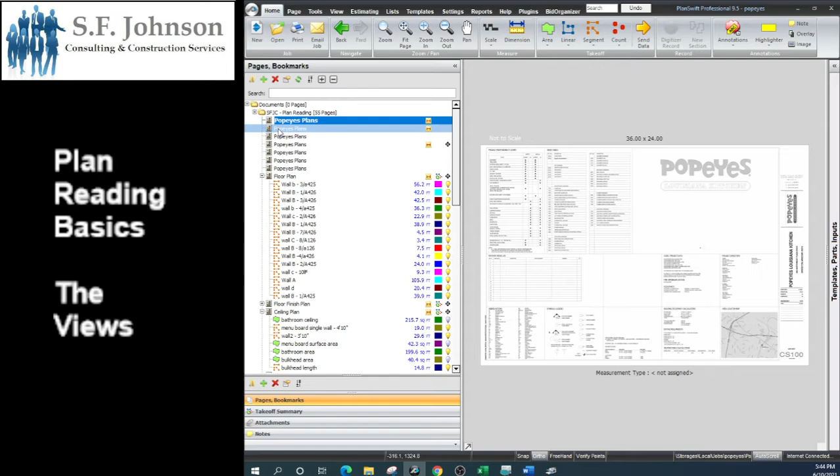We think we'll start with the cover sheet, and we'll start with the MEP site plan somewhere in here. And why isn't it marked? Oh, because Stacy likes making this life difficult. Let's hope we didn't delete it. Okay, let's go back.

Oh, there we go. All right, so we'll go with the MEP site plan. So plan view - when we say plan, it's the view from above, like if you're hovering over, maybe flying over. It's the most basic of the views. So what we're looking at right here is the MEP site plan in our study set. MEP is mechanical, electrical, and plumbing, and it's basically showing us the site plan from the plan view of where all of those things are located.

So if we pan in, we'll see 8-inch water, 4-inch gas, underground telephone. But the whole point is the view, or how we're looking at this sheet. So the view is again the perspective from which you're looking at the sheet or looking at the information on the sheet. The plan view is the most basic of the views.

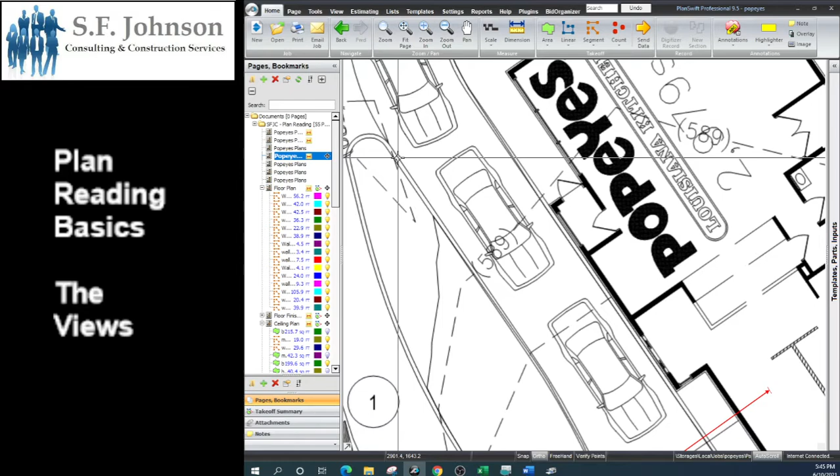I say basic in terms of if we wanted to construct maybe the curbs - from this view, we can't really do anything other than measure how many linear feet of curb we're going to construct. It doesn't tell us anything about the thickness, the radius of this angle. It doesn't give us any of that stuff. So we could do a very poor job if we decided to use this plan view in order to construct anything here.

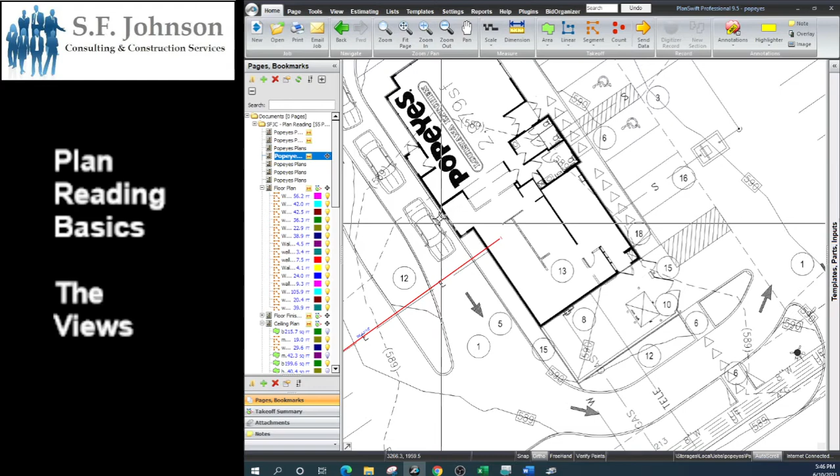Same thing with, say for instance, the exterior walls on the Popeyes. We can use this view to measure how many linear feet of exterior wall, but it doesn't give us detail to tell us the thickness of the walls - is it 2x6, 2x8, whatever. Doesn't give us the height of the wall. We don't know the height of these walls.

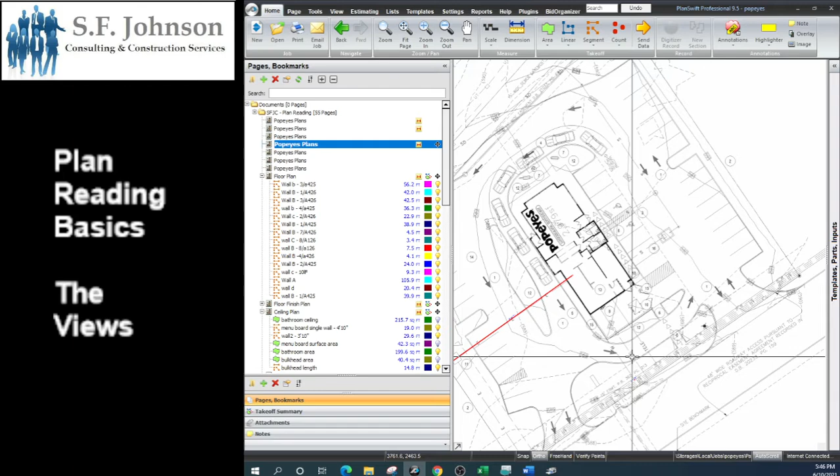So again, the plan view is the most basic of the views, and it gives us a good idea of what we're looking at. It's a view from above, but it doesn't give us detail. Let's go to another plan view, this floor plan - same view from above as if we've taken the ceiling and the roof off, and now we're looking into the building. Same view from above, and same thing: it gives us the information where we can measure how many linear feet of each of the interior and exterior walls are. They're even marked, so we know this is wall B. And pretty much the plan view, that's all we can do from a plan view, because again, we have the same problem - we don't know the height of the wall.

And so in order to see the height of the wall, we go to the second of the views, which is the section view. Section view gives us the vertical view of any section where it's intersecting.

Okay, so this is a floor plan. And so what the floor plan gives us is how many linear feet. But the section view is going to say, well, I'm going to tell you the height of the wall along this stretch or this section of wall.

And the way that you read it is that you go to image or picture number 1 on the page, notified or signified at the bottom. So we go to image number 1 on page A426, and this is a section view.

Again, the architect can only give us what? Abbreviations and symbols and lines and numbers to represent what they want us to do in terms of now I'm the framer and I have to build these walls.

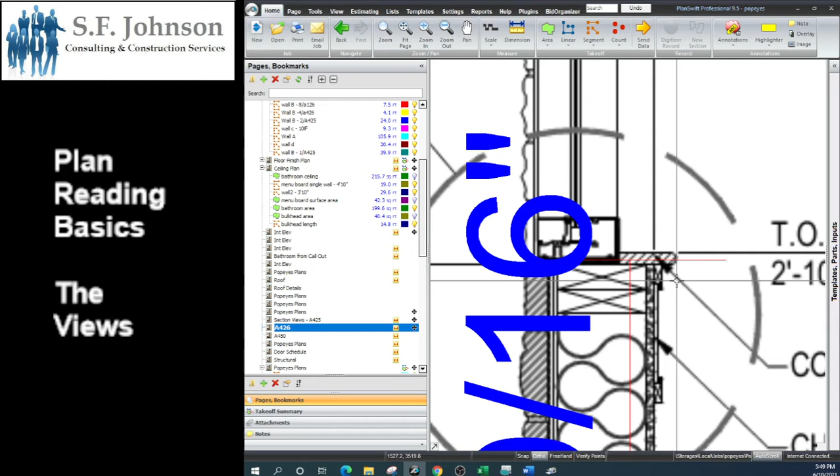Same concept applies if we want to see what is missing. So what the architect is saying, there's some stuff here. You see the sill, you see the chair rail, you see that it's 2x6 wood stud, you see everything on this side, but there are certain things detailed in here that we don't have written here that we need you to get another what? View.

Okay, so you go to the third of the views, which is the detail view. Same concept applies. So what do we see here? So we know what we don't see here when we go to 5 over A600. So you see what the difference is, right?

So again, we see the sill, we see the chair rail, stone veneer, even the expansion joint right here. And actually we have two callouts, right? We have 5 over A600 for this encircled here, which is the intersection of the bottom of the window and the top of the wall.

Okay, so that's pretty much what the architect is saying. There's something about that we need to see, that if you go to 5 over A600, and let's go there now, you can see what you don't see here.

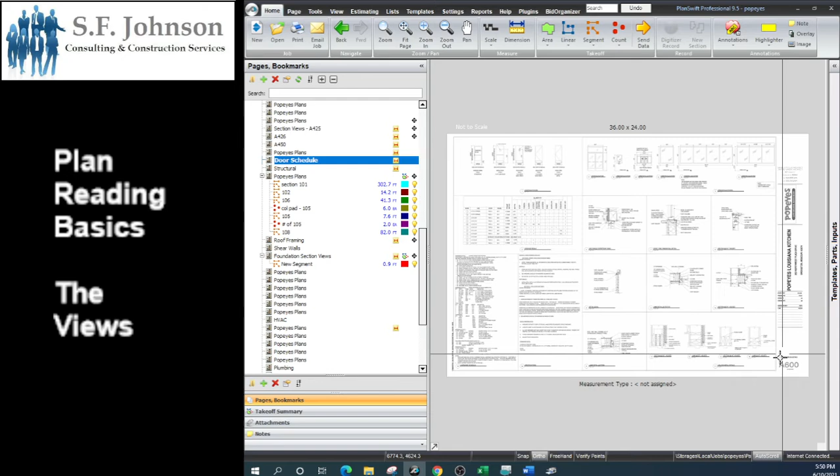5 over A600, here's A600, image number 5. Where is it? I don't have my glasses on, Grandma. All right, here we go.

5, detail at sill. So yeah, continuous caulking wasn't shown in the previous. Continuous flashing on the window wasn't shown in the previous, and all of this, okay?

And so now you've gone to the third of the views, the detail view. It is a detail view. And you see at the detail view, it gives you everything that you didn't see at the section view, so you can complete the proper construction at that area. Okay, so that's the third of the views.

Now the fourth of the views is kind of different in that we don't really need that view for construction. That view we need for the finish trades. Okay, so now what we're looking at here is the floor finish plan.

The floor finish plan gives us indication by all of the floor tags, telling us what type of material it is by pointing to it. But this floor finish plan also gives us these little things that look like section view markers, but they are not. They are elevation markers.

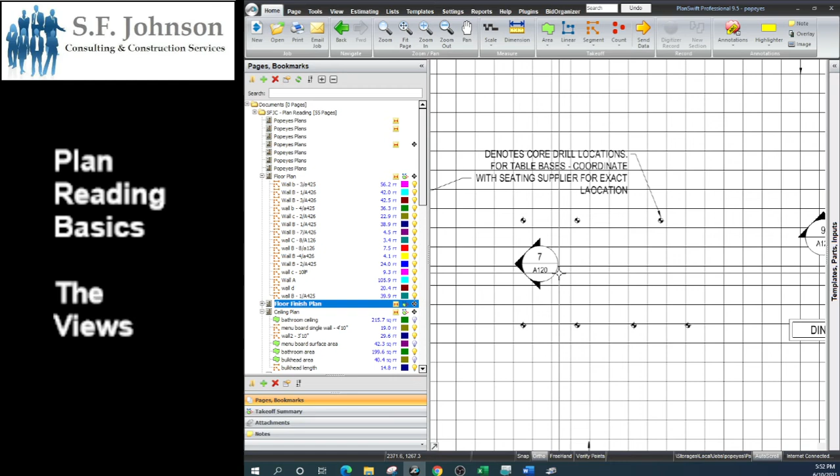So what it's telling us is that if we go to image number 7 over at page A120, we're going to see all the finishes that's here on this wall. If we go to image 9 over A120, we'll see all the finishes here and all the way around.

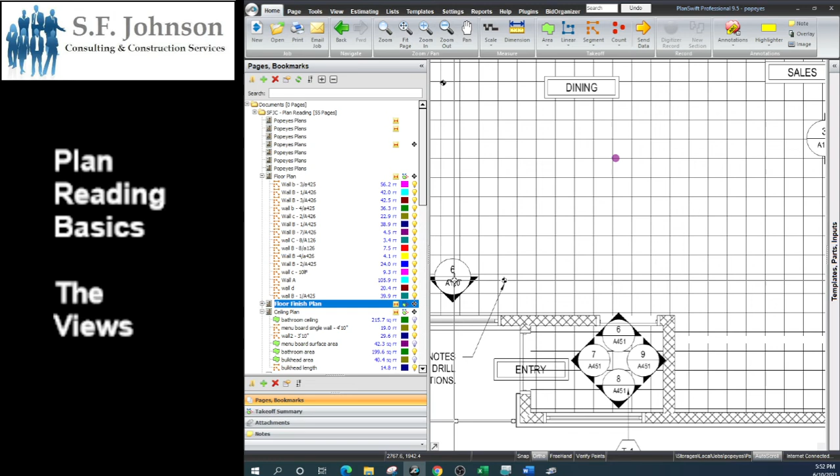You always want to see elevation markers. So this is an interior - these are interior elevation markers, are what they're called. They're used to point you to an individual wall, whatever it's pointing to. If you go to that picture on that page, it's going to show you how the finishes are arranged on the wall. So let's go to the first one, 7 over A120.

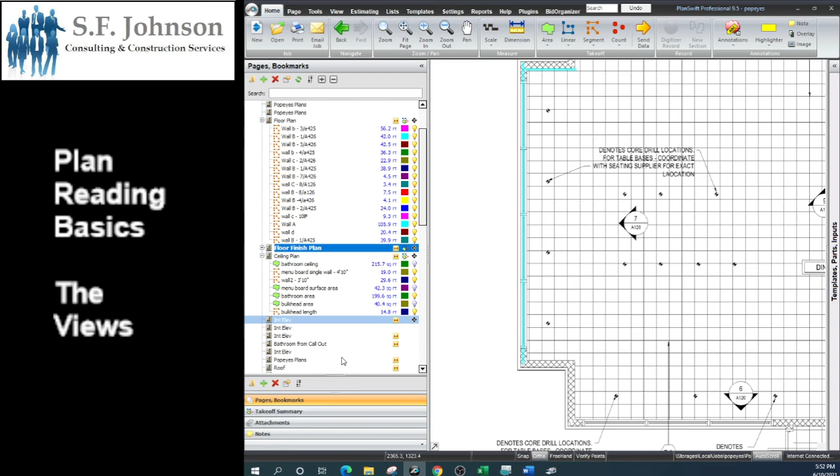Let's see, 7 over A120. This is 126, so we got to go back up a little, 7. And then image number 7. Okay, so image number 7 is right here, the dining room elevation.

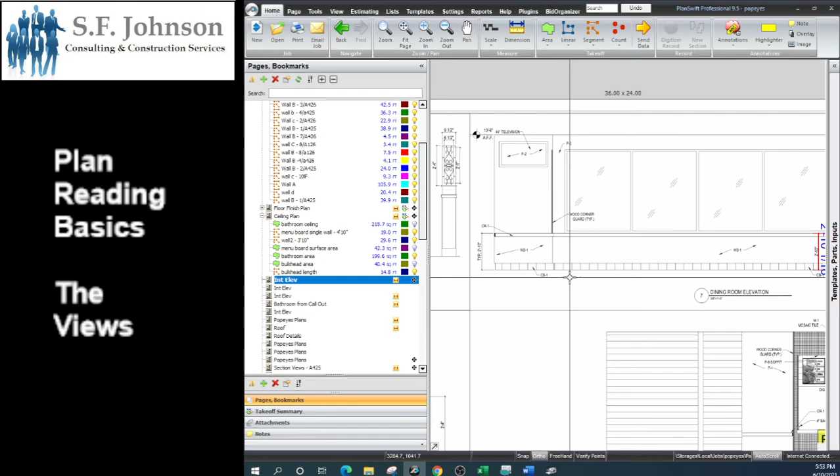Okay, so now it's showing us all our walls are built, right? So showing us where the finishes are going, where P2 is going, where WS/1 is going, where CB1 is going on that wall. So now I'm the finish contractor, I'm the painter, I'm installing some of the finish trim or finish whatever. I can make my measurements using the interior and exterior elevations.

You also have the same thing on the exterior. Let me show you some exterior elevations, right? Same thing for the outside. So now exterior elevations show you all the finishes on the outside.

So now I'm the brick veneer professional, I'm the caulker, I've got to caulk around the windows. I can use this to make all my measurements. Okay, so that completes the 4 views.

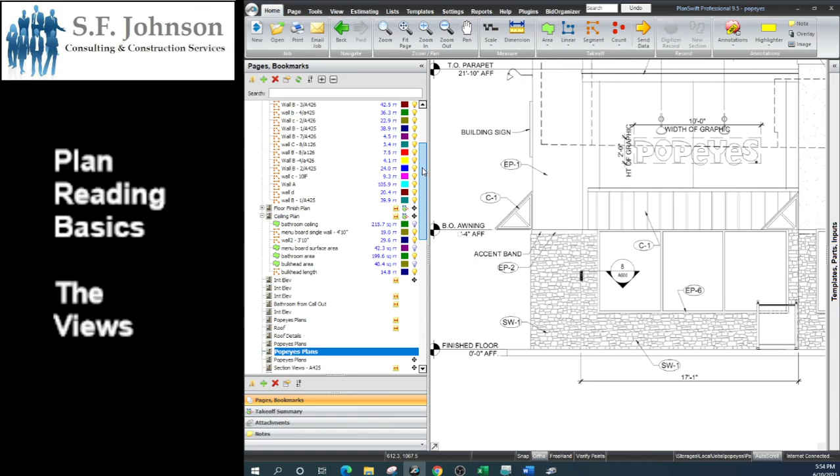You have the plan view, the most basic of the views from above. Right? It's the view from above, most basic of the views. What we see the most is the floor plan. From the floor plan, of course, we're measuring how many linear feet of wall, but we need a height for the wall. So the section view takes us to the height.

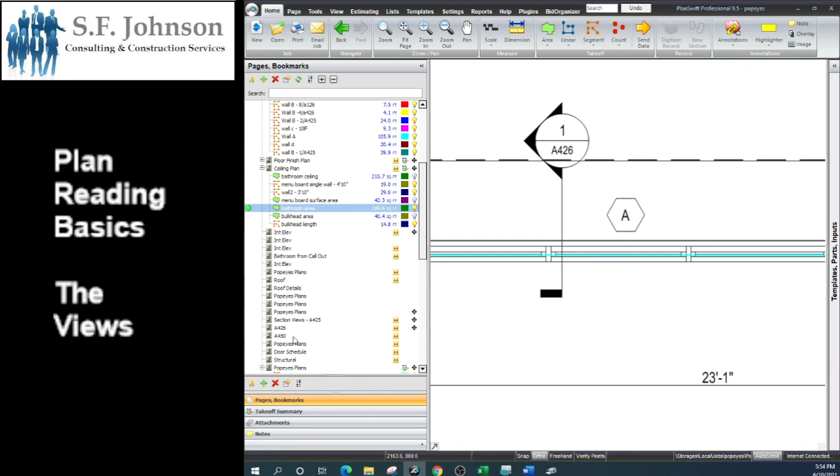Okay, so that's the second of the views, which is the section view. The section view now gives us the height - we were up here from the floor plan. Section view gives us all of the individual sections, so now we can see how the interior walls are built. Helps us with our wall construction, helps us determine how many square feet of wall.

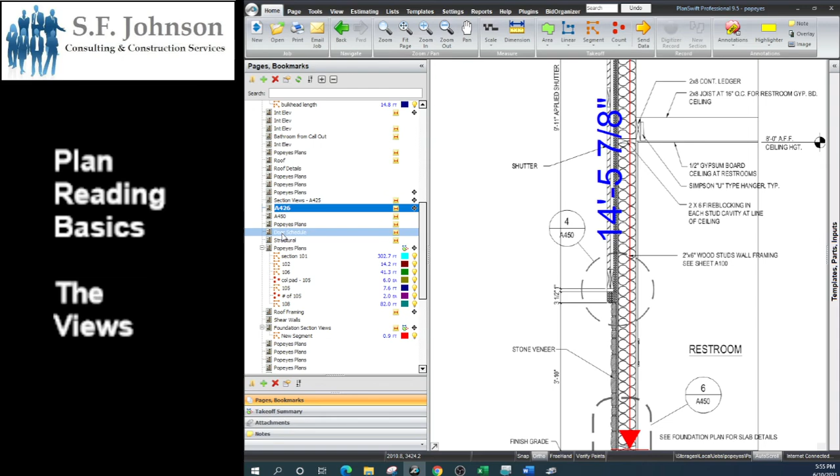And then when we're in our section view, 9 times out of 10 we're going to go into a detail call out to take us to another view, giving us information about what we don't see here to ensure we complete the proper construction. And then the last of the views - well, let's go to the detail view. Okay, so the detail view has all the things we didn't see in the circle. You're going to always have a sheet of detail views pretty much in every set, right? Because there's always something - we've got to get down to the nitty gritty of the construction.

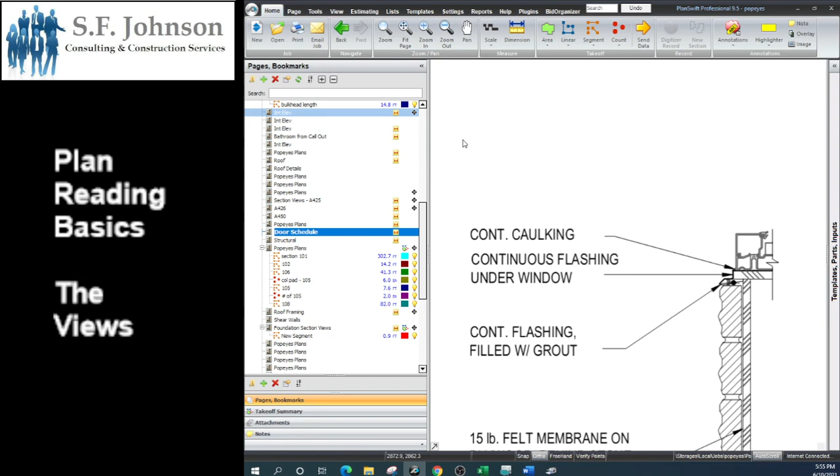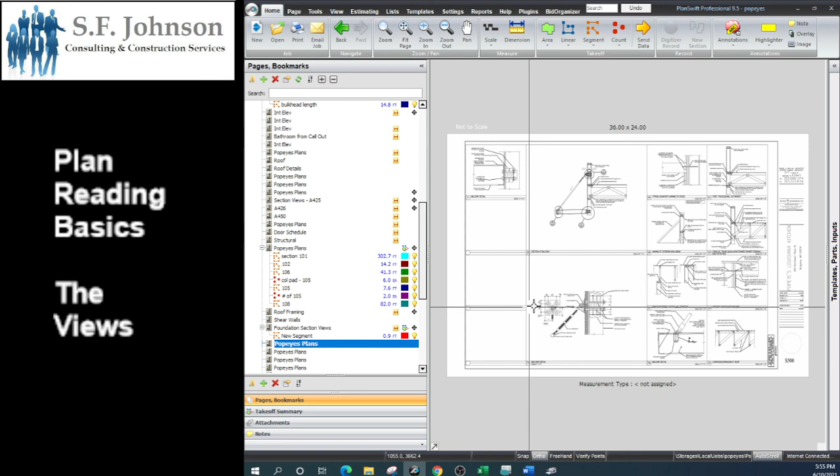And then the last of the views are for the finish trades, interior elevations. So the painter, the finish trim, the tile, the wall base professional knows where all of that goes, and that's at either an interior, inside elevation view, or an exterior elevation view. Let's find it - oh, of course that's not it. Or here we go - or an exterior elevation view. Okay, so that completes the 4 views.